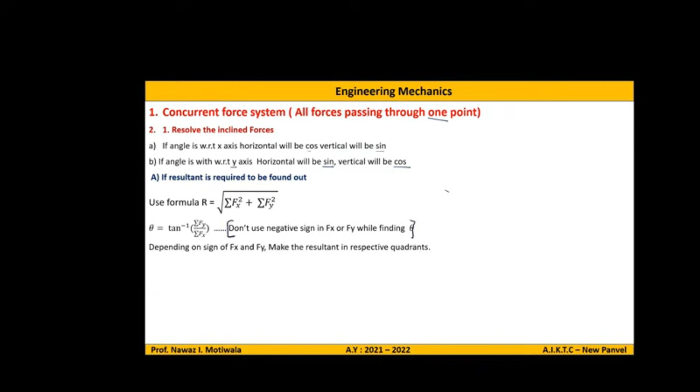And in this you have to remember this part - don't use negative sign in fx or fy while finding out theta. Okay, and then finally, depending on sign of fx and fy, you will make the resultant in the respective quadrants.

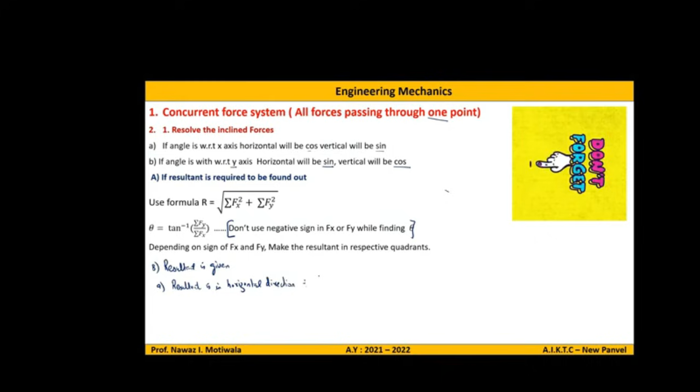So if resultant is in horizontal direction, what can I write for summation of fx? Wherever resultant is given, the resultant will appear there. So R is summation of fx because resultant is in horizontal direction, and summation of fy is equal to 0.

That was part A. If we see the second case, case B - resultant is in, let us say, vertical direction. So in this case I will write summation of fy is equal to R and summation of fx is equal to 0. Any doubt?

No sir. Case C means let us say resultant is 0. In the question see resultant is 0, meaning neither horizontal nor vertical. So it simply means summation of fx equal to summation of fy equals to 0.

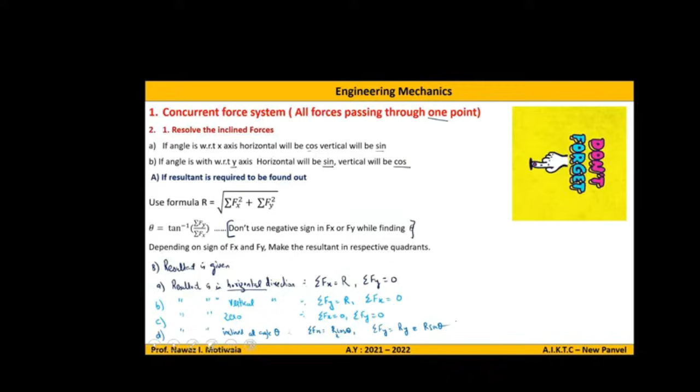Okay, so here again I have taken the example from December 2020 exam for 5 marks. Find the resultant of given force system. Before going ahead, what is the first step?

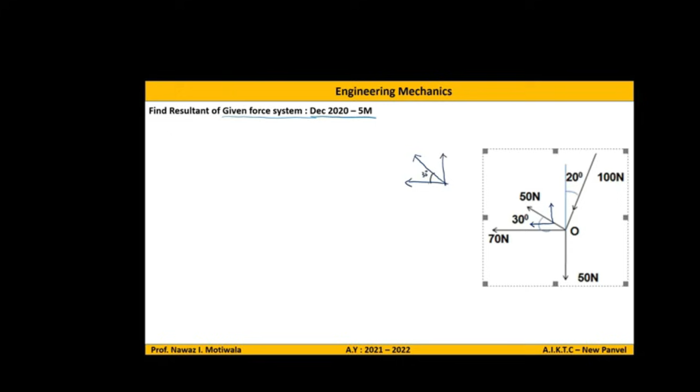Now if I look at this force, the 100 Newton one, I will make it separately here. Let's say it's 100 Newton force. See the direction where it's going. It is going down and left. So one will go left, one will go down.

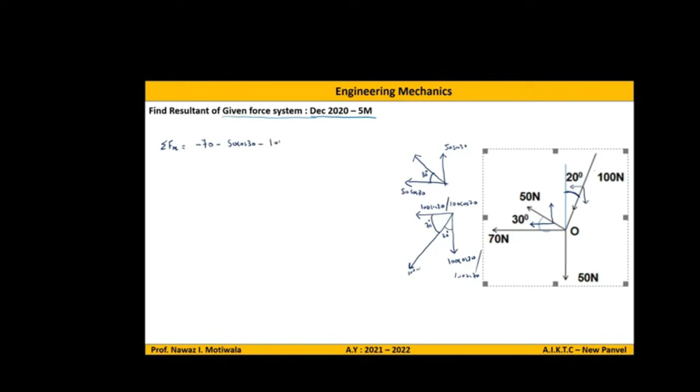Minus 100 sin 20, minus 50 cos 30 - wait, let me redo this properly with cos 70. So we have written all the negative terms. This comes out to minus 147.5 Newtons. So this is summation of fx.

Now next step, I will write summation of fy. Add all the forces in y direction. So in y, one is going up, 50 sin 30. Then minus 100 cos 20, and minus 50. That's it, so all the things are done.

So just again use the calculator and tell me. Minus 118.96 Newtons. So we got fy, we got fx.

Then I will write R is equal to root of fx square plus fy square. That will be minus 147.5 square plus minus 118.96 square. So if I calculate, what comes out is 189.49 Newtons.

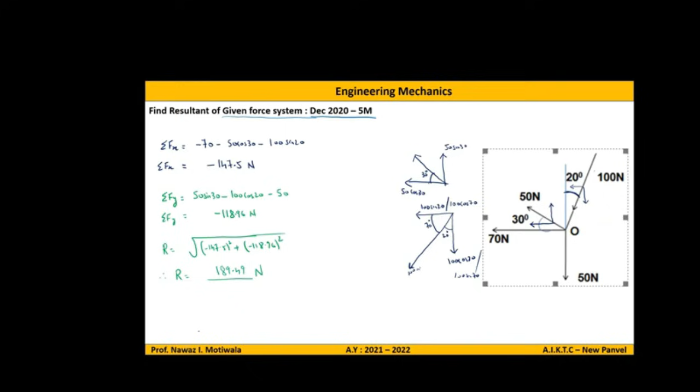So for theta we have the formula tan inverse of summation fy by summation of fx. And one thing you have to remember while finding theta is what? Negative sign - don't consider negative signs. So it will be 118.96 divided by 147.5. So what's the angle coming out to be?

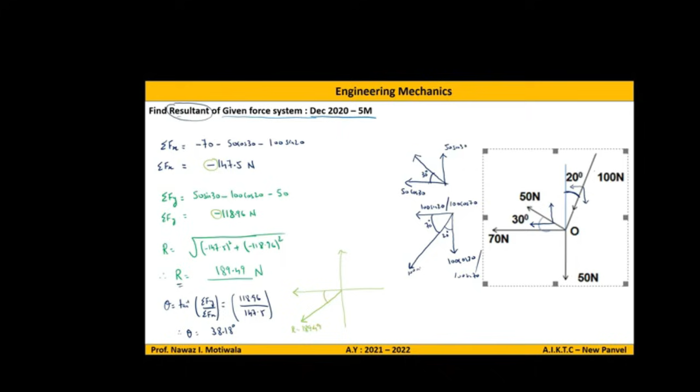So what I'll do here is mark this as the third quadrant, since this is third quadrant. r is equal to 189.49, and we always show the angle with respect to the x-axis. So this angle is 38.18. This completes the solution.

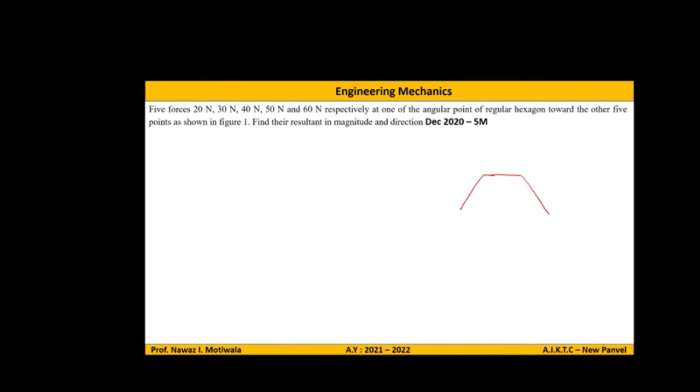What is it saying? 5 forces of 20 Newton, 30 Newton, 40 Newton, 50 Newton, 60 Newton respectively at one of the angular points of a regular hexagon towards the other 5 points, as shown. What does that mean?

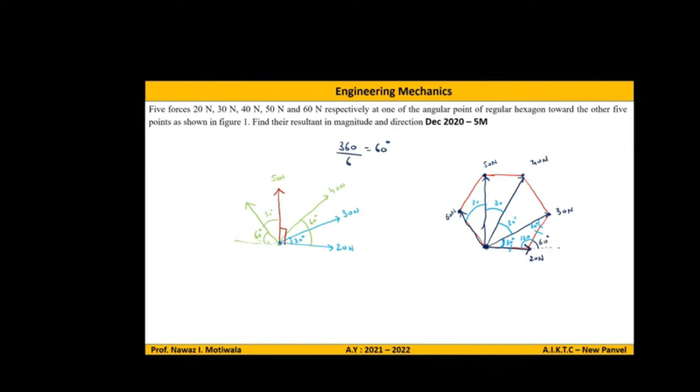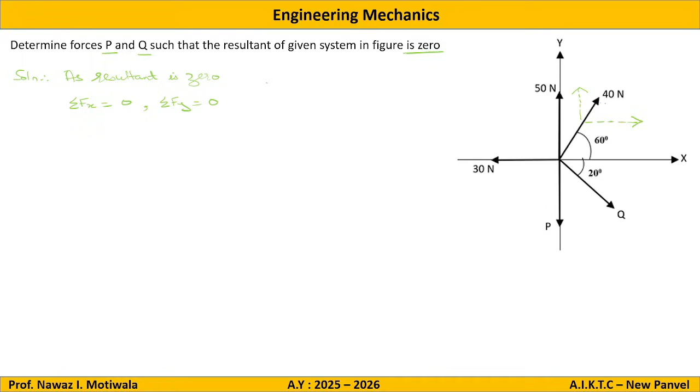From the figure you can see there are two inclined forces. We will resolve it into x and y components, drawing one line parallel to y and one parallel to x. The direction of force is going towards the right side and top, so this will go right side, this will go on the top side. The angle is given as 60 degrees, so this will become 40 cos 60 and this will become 40 sin 60.

Similarly, this is also an inclined force. I will make the resolution by drawing one line parallel to x, one line parallel to y, with the force going down and right. This is going right side and this is going down. The angle is given with respect to the x-axis as 20, so this will become q cos 20 and this will become q sin 20.

Now once all the forces are found, we can go with the equation part. Let us first write the equation for summation of Fx, which is adding all the forces in the x direction. First is 40 cos 60 going right side, so positive. Then we have minus 30 going left side. Then we have plus q cos 20. So this completes writing all the forces in the x direction.

But now from the given data we know that Fx is equal to 0. So I will put it here: 0 equal to 40 cos 60 minus 20 plus q cos 20. On solving this entire equation, since there is only one unknown, I will get the answer directly as q is equal to 10.64 Newton. This is one of the answers.

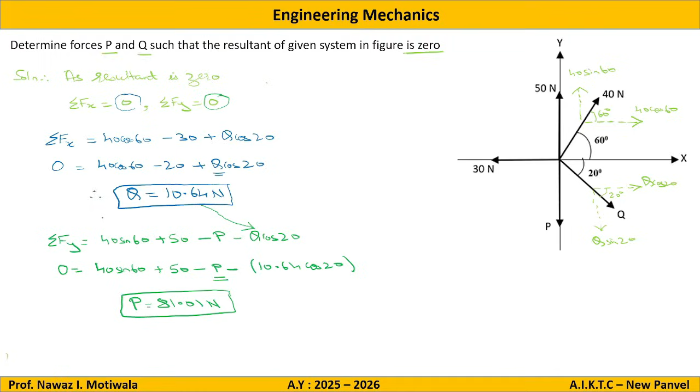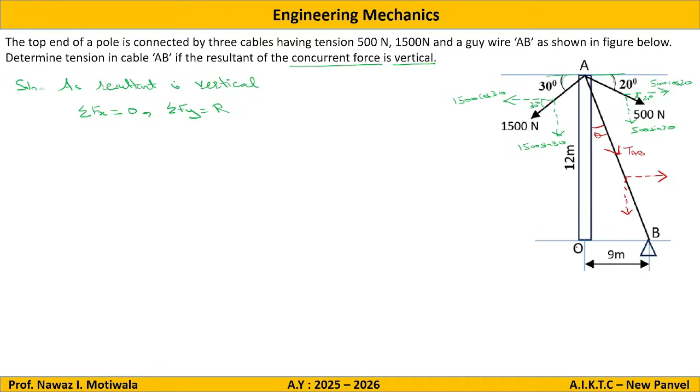Now regarding the angle, we don't have the angle here for this force, but we do have the sides of a triangle. So by using these sides, we will first find out the angle. Let us say if I want to find this angle theta, assuming that this angle is theta, I have the opposite side of theta and I have the adjacent side of theta. So I will use the trigonometric ratio of tan theta.

So from the figure, tan theta is equal to opposite, that is 9, upon adjacent, that is 12. So I get theta is equal to tan inverse of 9 upon 12. On solving this, I should get the answer for theta as 36.86 degrees.

So once I got this theta, it is now with respect to the y-axis. So here also I will write this theta with respect to y-axis. This will become TAB cos 36.86 and this will become TAB sin 36.86. So once all the forces are resolved, now we can go for writing the equation part.

Now for the equation part, first I will write summation of Fx is equal to adding all the forces in the x direction. So we have one force going right side, that is 500 cos 20. Then one force going left side, that is 1500 cos 30. Then we have one force going right side plus TAB sin 36.86.

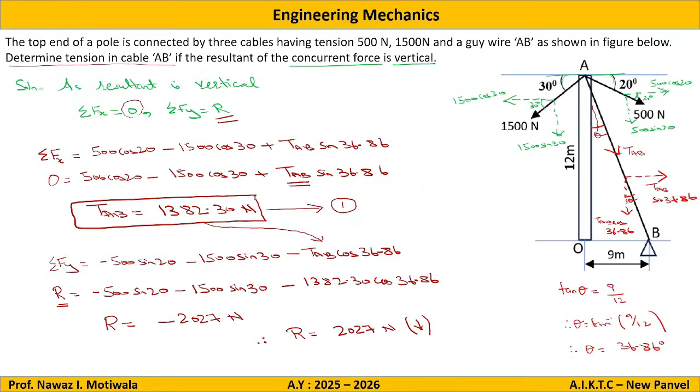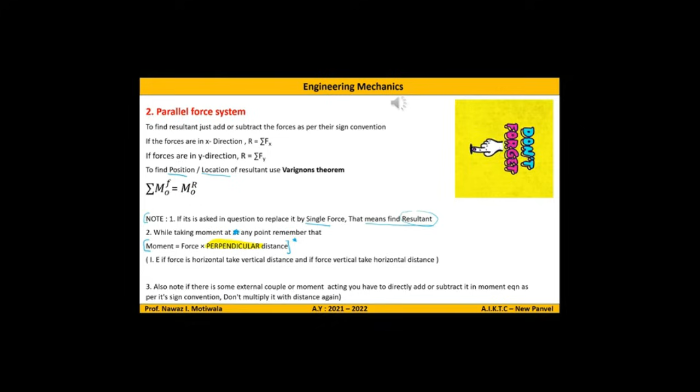No, that particular point is not this one, I'll discuss that later. Also note that if there is an external couple or moment acting, you have to directly add or subtract the moment equation as it is, as per the sign convention. Don't multiply it with the distance again.

What does it mean? For example, if you are given a couple of, let us say, 20 Newton meter acting, and you are taking moment about point A, you have to take this couple into consideration as it is, without multiplying with the distance. Do not multiply with distance.

One more question - let us say it can be an oral question also. Let us say if I am taking moment about point A and there is a couple here also of, let us say, 30 Newton meter. Will I consider this 30 Newton meter in my calculation of moment? Yes or no? Some said no sir, it will be zero. Some said yes sir, no sir - we will consider it.

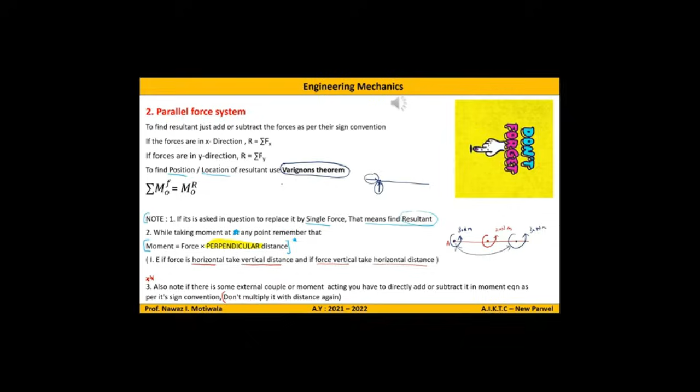It says, find the resultant of a parallel force system shown in figure and locate the same with respect to point C. So as it is asked to find out resultant, we have only one option with us - that is one formula, R is equal to root of summation fx square plus summation fy square.

If you observe here, it is a parallel force system. There is no force here in x direction. So if I write Fx equal to 0, this term will go off and I will remain with R equal to square root of summation Fy square, which is nothing but R equal to summation of Fy.

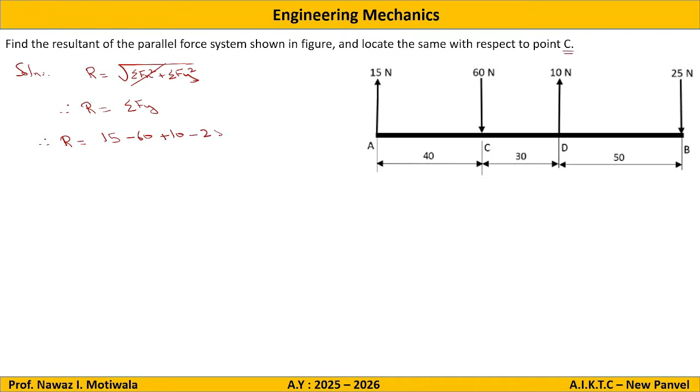We need to calculate summation of Fy, which will be the resultant force. So R is equal to add all the forces in y direction. From the figure, 15 going upside positive, then minus 60, then plus 10, and then minus 25. Once we calculate this, we get answer as minus 60 Newton, which we can write as 60 Newton in downward direction.

Now, once we got the value of R, we'll locate this in the main diagram. Because it is going downward, I will make resultant anywhere on the body, but the direction should be a downward force. So I will make a downward force and write this as R is equal to 60 Newton. This we need to locate in the main diagram.

Now, the next thing asked is to locate the same with respect to point C. Location of resultant is required to be found out from point C, and to find the location of resultant we use Varignon's theorem, which says that summation of moment of all forces about point C is equal to moment of resultant about the same point C. This is nothing but Varignon's theorem.

So starting with the left hand side part, we need to find summation of moment of all forces about point C. So now come to the object, the main figure. We need to find out moment from this point of all forces.

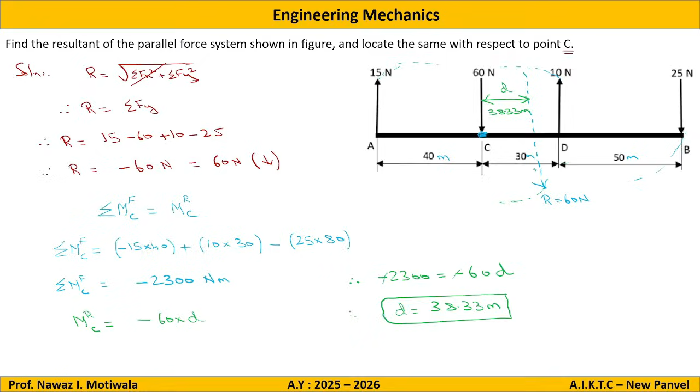Let us proceed to the next question, which says replace the given force system into two parallel components at B and D. Now read the question carefully again. It says that replace the forces at points B and D. They are not telling us to find the resultant.

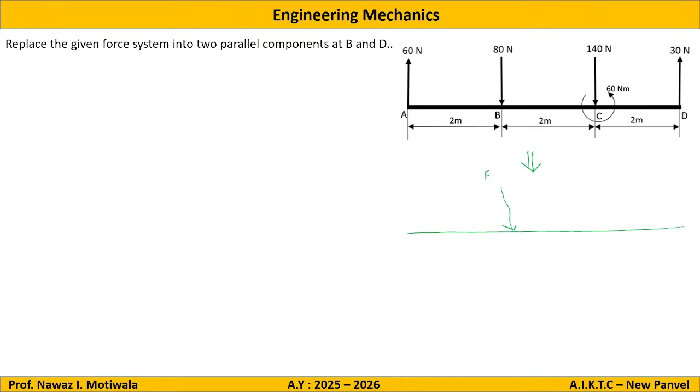They are telling us to replace this entire diagram with only two parallel forces. So if I go as per the question, what is required is that this given actual diagram should be equivalent to only two forces at points B and D. So let us say I will assume this force as FB and this force as FD.

So we need to convert this entire diagram force system into only two forces at points B and D. That's it, it's very simple. As these both are equivalent, the values should also be equivalent.

So from the diagram, considering the solution part, as these both diagrams are similar, having the same net effect, what I can do is equate all the vertical forces in diagram 1 with the vertical forces in diagram 2 because they are equivalent.

So from diagram 1 we have the forces: 60 going upward, minus 80, minus 140, and plus 30. These are the vertical forces in diagram 1. This should be equal to the vertical forces in diagram 2, that is minus FB minus FD.

So finally, if I solve this equation, I will get FB plus FD is equal to 130. Let this be equation number 1, because we will not get the final answer here. But this equation I got by equating the forces in diagram 1 as well as diagram 2.

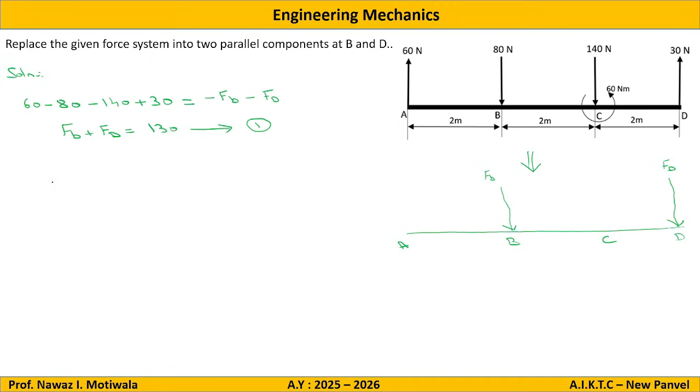Now similarly, as we equated the forces, now I will equate the moments. Because both bodies have the same effect, I can also equate the couples. So let us say I am taking moment about point B.

So from the earlier diagram, the diagram of the given question, taking moment about point B: this force 60 is making a clockwise movement, so it will be minus 60 into distance 2. Then we have the 80 force which is passing through point B itself, so the moment will be 0. Then we have this force of 140 making a clockwise movement, so again this will be negative 140 into distance 2. Then we have this 30 Newton force which is making an anti-clockwise movement with respect to point B, so it will be plus 30 into 4.

These are the moments caused by the forces. Then we also have a couple given at point C, that is an anti-clockwise couple, so I have to add this coupling moment also: plus 60. So these are the moments of all forces about point B from diagram 1.

Now this should be equal to the moment of all forces in diagram 2, the equivalent diagram. So if I take moment about B on this diagram, this force is passing through point B, so the moment will be 0. This force is making a clockwise movement, so it will be minus FD into distance from point B, which is 4 meters, 2 plus 2.

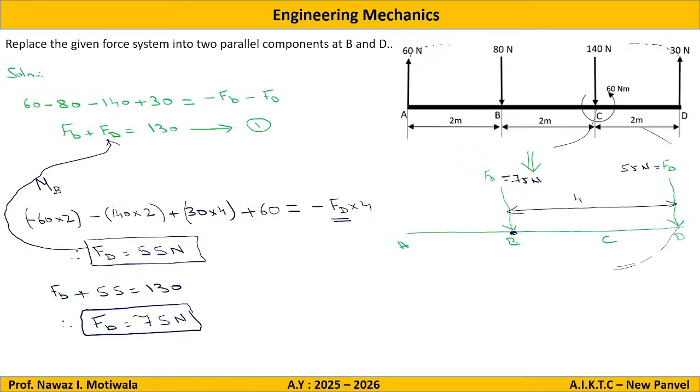Let us move to the next question, which says convert the given force system into a force and couple system at point A. Now here, into a force means a single force, and that single force corresponds to the resultant. So by default we are required to find out what is the resultant of the given force system, and we need to replace it at point A along with the couple.

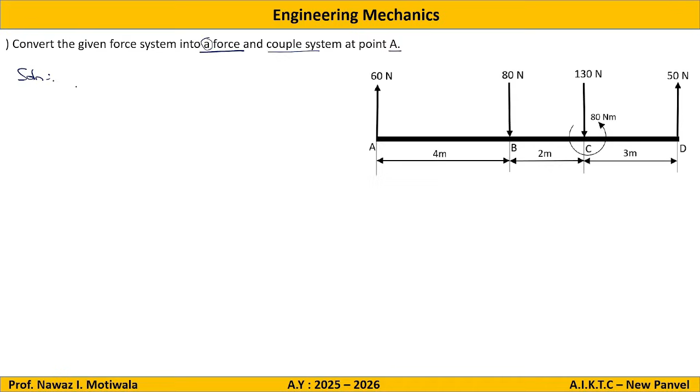So let us start with the solution part. As we need to find out the resultant, I will write: if I observe that on the right hand side all the forces are parallel to the y-axis, so I will directly write R is equal to summation of Fy, because there is no force in the x direction here. So if I calculate this, R is equal to summation of Fy, that is positive 60, then minus 80, then minus 130, and plus 50.

So on solving this, I am getting the answer for R as 100 Newton.

Minus 100 Newton, which I will write as 100 Newton in downward direction. Now, important point - most people make a mistake here because it is given to replace it at point A, they start using Varignon's theorem. That is a wrong concept. Varignon's theorem will be used only when the location or position will be asked.

Here we are not required to find out position or location, but we are required to shift it at point A. We need to show the resultant at point A. So what you do is just find the moment about point A. That's it, no Varignon's theorem, just find a pure moment about point A.

So if I find a moment at point A, this force 60 Newton is passing through the same point, so its moment will be 0. This force with respect to point A will make a clockwise movement, so it will be minus 80 into distance 4. Then we have minus 130, this force also making a clockwise movement, so minus 130 into distance from point A is 6. Then we have this 50 Newton force with respect to A, it is making an anti-clockwise movement, so it will be positive: 50 into distance from point A, which is 4 plus 2, 6 plus 3, 9.

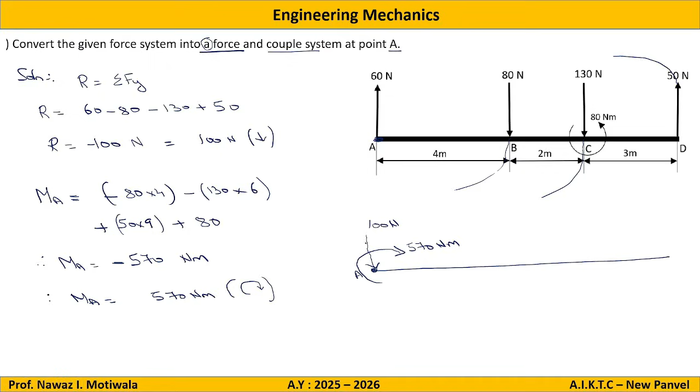This completes the general force system.

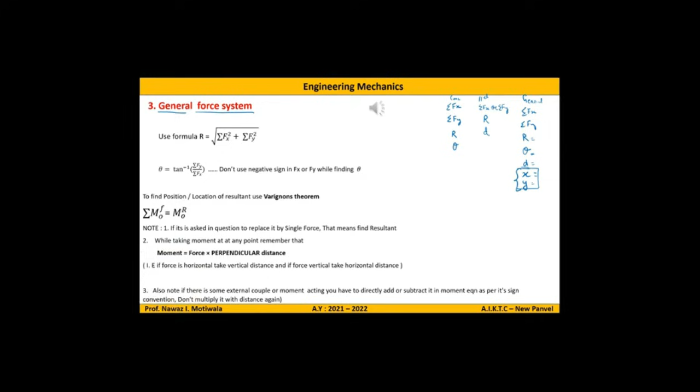So let us move to the next question, which says: calculate the resultant of a given force system and locate it with respect to point O. So two things here: resultant and location. For location we need to apply Varignon's theorem. Let us see if I make the structure here.

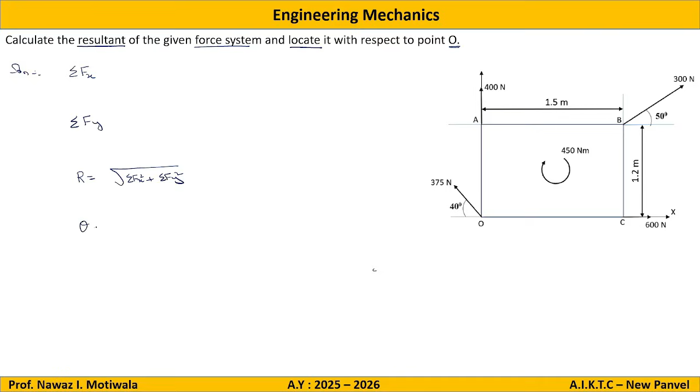Solution: as we require to find out the resultant, first we need to calculate summation of fx, then we will need to calculate summation of fy. Once we got fx and fy, we will find out R with the formula summation of fx square plus summation of fy square. Once we got R, we can also find theta, which is equal to tan inverse of modulus summation fy upon summation fx. So this becomes the structure, and finally, once we want to find out d, we will apply Varignon's theorem.

So starting with summation of fx and fy. Before starting any problem of mechanics, first we need to resolve the forces in x and y components. So here you can see there are two inclined forces, one is 375 Newton and another is 300 Newton. So first I will resolve this into two components.

Let us see going left side and top because of the force direction, so this will become 375 cos 40, this will become 375 sin 40. Similarly, this force going right side and up, so this will become 300 cos 50, this will become 300 sin 50.

Once the things are resolved, now I can write the equation for fx and fy. So fx, adding all the forces in the right direction: we start with 300 cos 50 going right side, so positive, then we have minus 375 cos 40, then we have plus 600. These are the three forces which are there in x direction.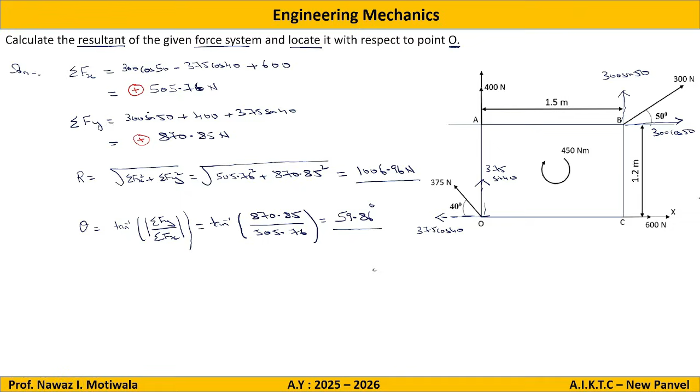Now for the diagram, what you observe is the value of fx we got as positive, fy also we got as positive, x also positive, y also positive. That means our resultant is in the first quadrant. So what I will do is, anywhere on this diagram you make one resultant force whose direction will be in the first quadrant. You can make this anywhere, but the direction should be in first quadrant.

So let us say I will write it here. R is equal to 1006.96 Newton acting at an angle of 59.86 degrees. This completes the first part of the question.

Now regarding the second part, it is given to locate it with respect to point O, and we know that for location we need to apply Varignon's theorem. So I will write summation of moments of all forces about point O should be equal to moment of resultant about point O. This is Varignon's theorem.

Now left hand side I have summation of moment of all forces about point O. Let us start taking moment of all forces about point O. So for point O, this force 375 cos 40 is passing through point O, moment will be 0. 375 sin 40 also passing through this point, moment will be 0. If you closely observe this 400 Newton, this is also passing from point O, the line of action is passing through point O, so moment will be 0 for this also. Also for this 600 Newton force, if you see the line of action of this force, again it is passing through point O, so this moment also will be 0.

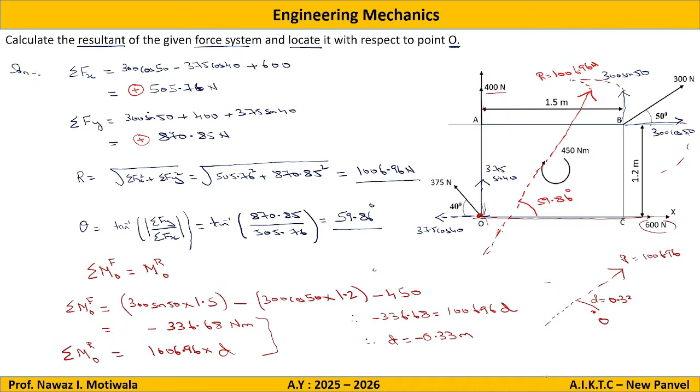This completes the question. Let us move to the next question. Again it's a similar kind of question. It says calculate the resultant of the given force system and locate it with respect to point O.

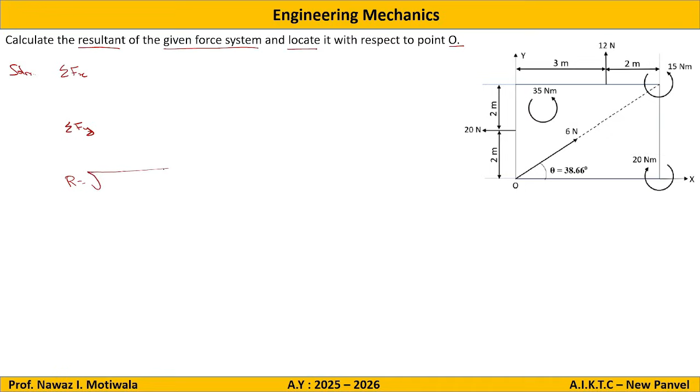As it is given to find the resultant, we have the same steps to follow: first find summation of Fx, then summation of Fy, then find the value of R using root of summation Fx square plus summation Fy square. Then find the value of theta, which is tan inverse of modulus summation Fy upon summation Fx, and then find D.

Starting with Fx and Fy. Before starting, we have to resolve the inclined forces. In the diagram, I can see there is only one inclined force, whose angle is also given to us. If I resolve this into two components, this will be 6 cos 38.66 and this will be 6 sin 38.66. All the forces are resolved.

Now we can write the equation summation of Fx, adding all the forces in the x direction. So it will be 6 cos 38.66 minus 20. On solving it, I will get the answer as minus 15.31 Newtons.

Similarly for Fy, adding all the forces in the y direction, 12 going upward is positive, then plus 6 sine 38.66. There are only two forces in the y direction. On solving, I get the answer as 15.74 positive.

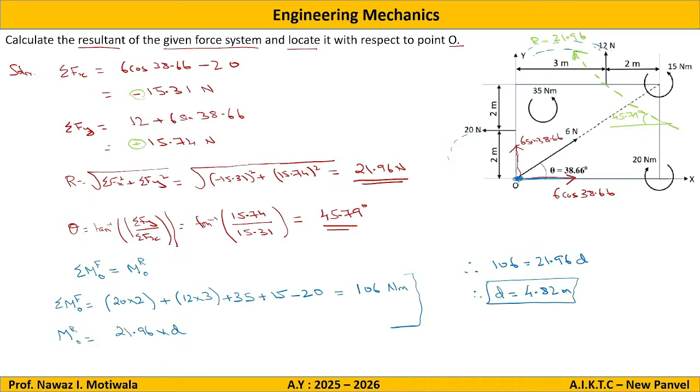Now let us go to the next question, which says, again similar type of question: calculate the resultant of a given force system and locate it with respect to point of action. So this is an incomplete question, let us assume that it is located with respect to point A.

So again, as it is given, we have to find out the resultant. The solution process will remain same basically. First I will find out summation of fx, then summation of fy, then we will find out resultant, and then we will find out theta.

So for fx and fy, first we need to resolve all the forces into x and y direction. Here I observe that there is one force of 200 Newton which is inclined. So I will resolve it into two parts: this component will go right side, this component will go towards down.

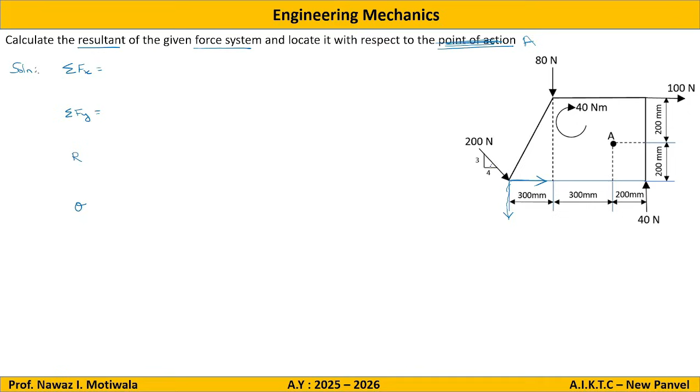Now regarding angle, the angle is not given directly, but we are given with sides. So let us assume that this angle is alpha. From the diagram I will write alpha is equal to tan inverse of 3 by 4, opposite upon adjacent. So I will get alpha answer as 36.86 degrees. So once I got this alpha is 36.86, this is also 36.86. So here I will get 200 cos 36.86 and this will be 200 sin 36.86.

Now starting with the fx part. So x is 100, right side positive, then we have plus 200 cos 36.86. There are only two forces in x direction. So on calculating this, I am getting the answer for fx as 260.02 Newtons.

Now similarly for fy, add all the forces in y direction. So we have the first force as 80 going downward, so minus 80. Then we have another force going downward, minus 200 sine of 36.86. And then another force of 40 which is going upside, so it will be plus 40. There are only three forces in y direction.

So calculating this, I am getting the answer for this as minus 159.94 Newtons. So we got fx and fy, so I can now find out R as square root of summation fx square plus summation fy square, which will be equal to square root of 260.02 square plus minus 159.94 square.

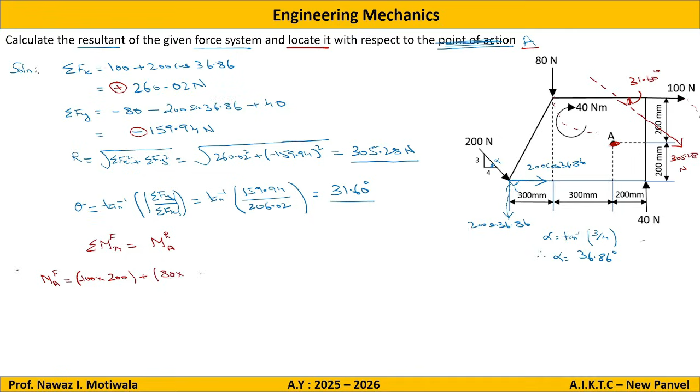So 200. Then let us say this force of 80 Newton with respect to point A is making an anti-clockwise moment. This 100 was making a clockwise moment, so that was negative — let me make the correction here, that will be negative since it is clockwise. Then plus 80. As the force is vertical, distance should be horizontal. So horizontal distance from point A is 300. So 80 into 300.

Then let us say this force 200 cos 36.86 with respect to point A is making an anti-clockwise moment, so it will be positive. So plus 200 cos 36.86 into, as force is horizontal, distance should be vertical. So vertical distance given is 200 for this force.

Then next, this force 200 sin 36.86 is also making an anti-clockwise moment with respect to point A, so we will get plus 200 sin 36.86 into, as force is vertical, we need horizontal distance. So horizontal distance from point A will be 300 plus 300, that is 600.

And then we have this clockwise couple of 40, so minus 40 will be added. So with this we have completed all the forces. Now one force is remaining, this 40 Newton. This 40 Newton with respect to point A is making an anti-clockwise moment, so it will be plus 40 into distance, which will be 200. So this completes the moment of all forces about point A.

One more thing here, the fundamental mistake which students make, I will also highlight. If you observe the units, here it is given as Newton meter, while the rest of the dimensions are in mm. So we need to convert this, which students don't do in the exam, for which they lose marks. So here it will not be 40, it will be 40,000, converting this into Newton mm. This is the important part of this particular question.

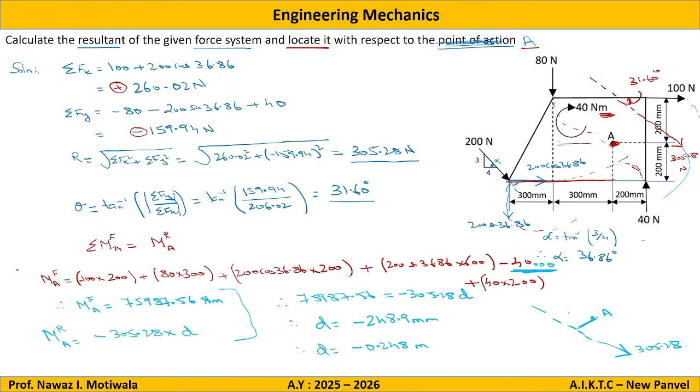Minus indicates that the resultant is not on the right side of A, but it is on the left side of it. What I will do is mark point A here and place the resultant on the left hand side. So this is R, 305.28, and this is the distance, 0.248 meters. This completes the problem. Thank you.

Next question: it says find the resultant of the forces acting on a bell crank as shown. Also locate its position with respect to hinge B.

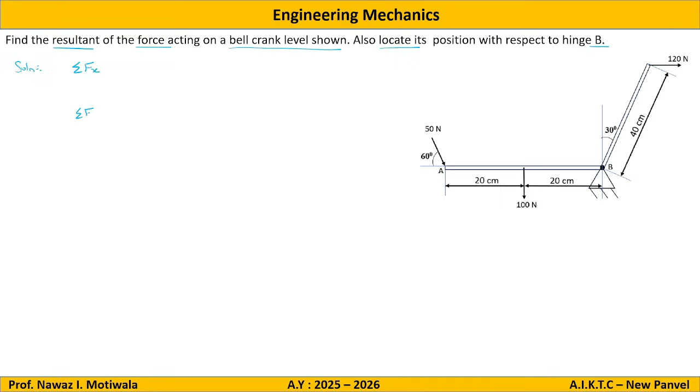Again, if you observe, it is asking us to find out the resultant of the forces. So whenever resultant is asked, we have only one procedure with us. First, we need to find out summation Fx. Then we will find out summation Fy. Then we will find the resultant with the formula root of summation Fx square plus summation Fy square, and then we will find theta with the formula tan inverse of modulus summation Fy upon summation Fx.

Proceeding further, we can see there is one force inclined here of 50 Newton, and the angle is also given. Once the angle is given, it is quite simple. We will draw one line parallel to x, and the force is going down and right side, so this component will go right and this one will go down. So this will be 50 cos 60, this will be 50 sin 60.

Okay, starting with the solution part. Fx: add all the forces in x direction. So we have 50 cos 60 going right side positive, and one more force we have of 120 Newton acting at the top here. On adding this, I get the answer as Fx equal to 145 Newtons.

Then for Fy, add all the forces in y direction. So in y direction it is minus 50 sin 60, then minus 100. There are only two forces in y direction. On solving this, I am getting the answer as minus 143.30.

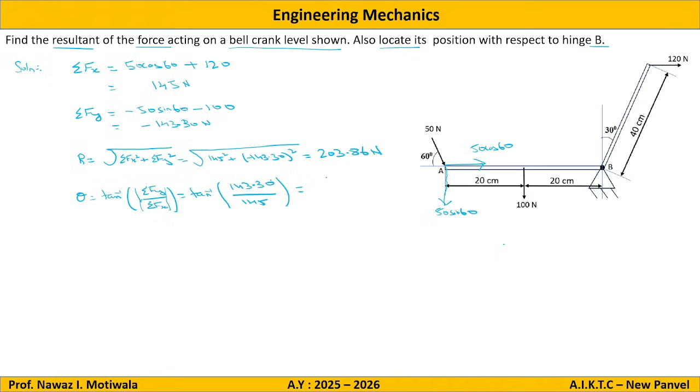Newton. So Fx is known, Fy is known, so I can find R as root of 145 square plus minus 143.30 square. So I get the answer as R equal to 203.86 newtons. Similarly for theta, I get tan inverse of modulus Fy, so it will be positive 143.30 upon Fx, that is 145. On solving this, I get the answer for theta as 44.66 degrees. So we got the resultant magnitude, we got the resultant direction.

Now what we will do is locate the same on the diagram. For that, we are getting Fx as positive, Fy as negative. X positive, Y negative, that means it is in the fourth quadrant. So I will place the resultant anywhere here, but its direction will be in the fourth quadrant. And I will get R equal to 203.86 acting at an angle of 44.66 degrees.

Now proceeding to the location, I will apply Varignon's theorem: moment of all forces about point B should be equal to moment of the resultant about point B. Left hand side: summation of moment of all forces about point B. Let us say I want to take moment of all forces about point B.

So the first force is this one, let us say it is making an anti-clockwise moment with respect to B, so it will be positive 50 sin 60 into, as the force is vertical, we need the horizontal distance from point B, which is 40. Then if you observe this force 50 cos 60, the line of action is passing through point B itself, so the moment will be 0. Then this force is making an anti-clockwise moment, so it will be positive 100 into distance, which is 20.

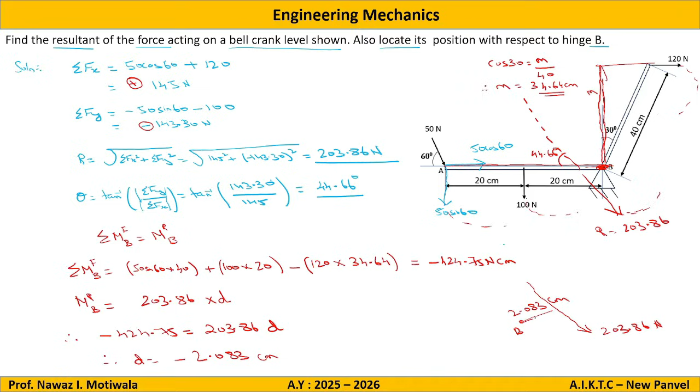Therefore D is equal to minus 2.083 centimeters. Now, as we got a negative answer, that means the location of R is not on the left of B, but on the right of B. So I will make a point B here, then say that the resultant is on the right hand of B: resultant equal to 203.86 newtons at a distance of 2.083 centimeters, on the right side of B. This completes the problem.